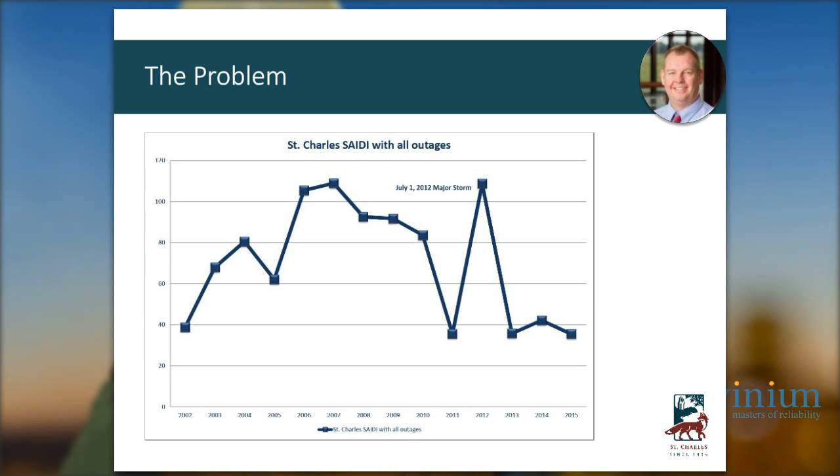So here's the problem. Hopefully everybody here is familiar with SAIDI, which is the System Average Interruption Duration Index. This is how many minutes per year the average customer in your city is without power, and we had been clipping along in the 40 minutes type area, and then through the mid-2000s we got into the 100 minutes. So that's a 100% plus increase in the number of customer outage minutes, and that was definitely something that our city council, elected officials and our population identified as a concern, and at that point, the electric utility was told to come up with something and fix it.

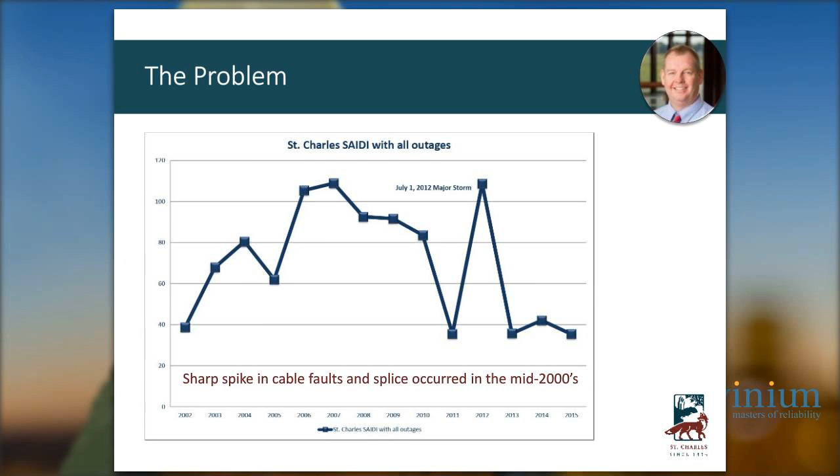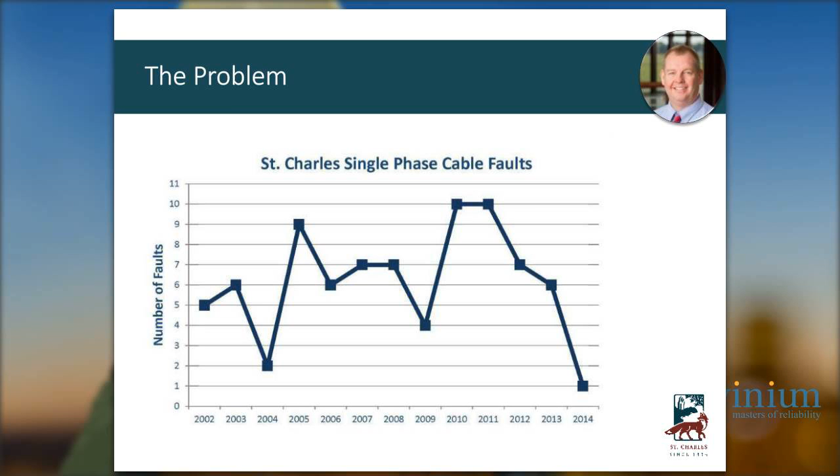So the reason for the bubble here that we see in the mid-2000s was a majority caused by some pretty major single-phase cable faults in people's backyards that led to long-duration sustained outages. Our cable faults actually got worse in 2010-11 as we were just getting into the program, but we did have a sharp spike in these cable faults through the mid-2000s. So we would go from 5 or 2, which was pretty manageable and not very impactful to your SAIDI number, to 2 years in a row at 10. And when you're averaging 1 a month sustained outage in a residential area, that obviously is going to draw some attention from your customers. So the work I'm talking about here today is our senior distribution engineer.

His name is Steve Shroba. He has a long tenure with Commonwealth Edison and then with the city of Naperville in Illinois prior to coming to St. Charles. He's a very modest man. So I am here on his behalf sharing some of the brilliance that he's put into our complete plan to

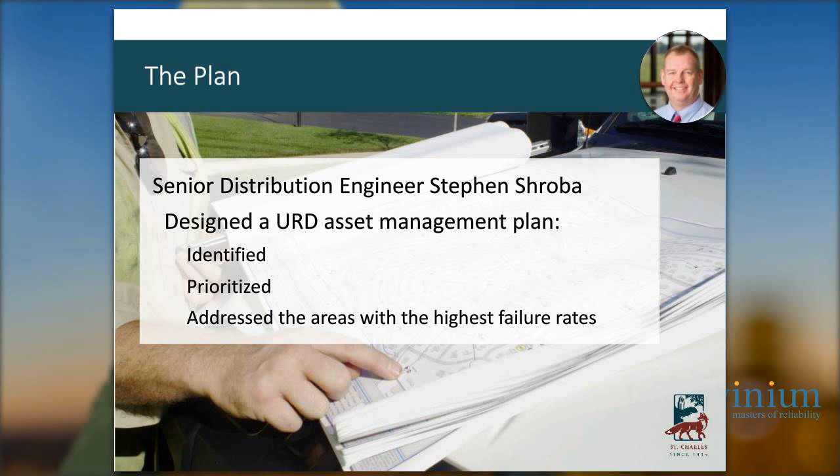address our URD cable. So his program that he laid out, first we identified all of the cable that we had in the ground. We had to prioritize which subdivisions and where we were going to go first. And then obviously he started with addressing some of the areas where we've already had cable faults, in some cases, a number of cable faults.

So what the plan looks like is a pretty interestingly colored spreadsheet in Excel. It's nothing fancy, but I'm going to go through the different elements of how we prioritize based on a multifaceted approach. It's not just age, it's not just previous problems. There's a number of things that Steve boils into why a certain subdivision is the next one to get reinforced.

So we start with subdivision and subdivision age. That can be very difficult, I understand that, to try and figure out where all the subdivisions are. We use the GIS mapping-based system to try and pull the pieces of the city apart in chunks using subdivisions. And in terms of age, we would go to the plat of survey or plat of subdivision from when the plat was recorded to get an age.

Another trick we used was transformers: many times either their serial number, or some of them actually have a year or a date of manufacture, month, year of manufacture, to try and at least get a feel for what span of years that subdivision was built in. Okay, so here it is a little closer.

The next thing we did is we looked at how many faults has the subdivision had. Obviously, if it's already had 1 or 2 faults, that's going to take a higher priority to something that hasn't had a problem yet. Traditionally, we would wait till a subdivision picked up its second fault, and then we would send the directional boring crew in and replace every cable in the subdivision after a second fault.

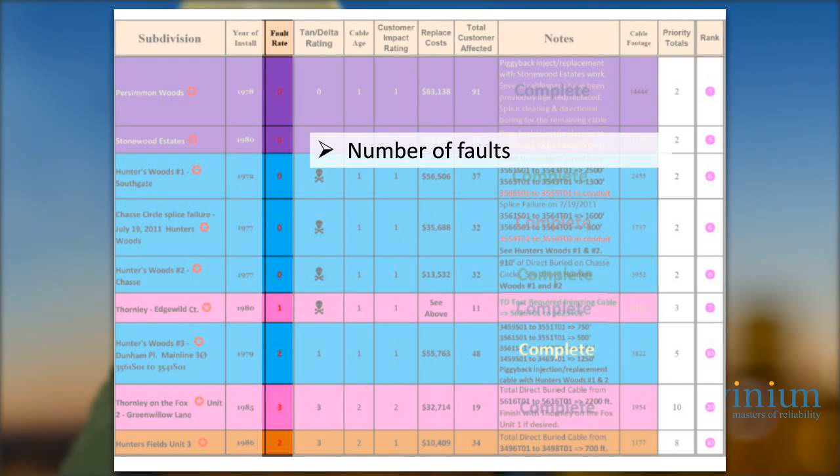So when you're having 10 faults, not only are there 10 neighborhoods that have some sustained outage, but there's also, in some cases, hundreds, if not many hundreds of customers, and you get the calls that they have to reset their clock because they had the momentary on the recloser.

So the next thing, which I think is very special with what Steve has embraced and has put together here, is to determine the insulation quality of these old cables by using VLF tan delta. And for the folks who might not be familiar with it, it's very low frequency.

It's 0.1 hertz testing. And then the tan delta element basically is a power factor test for the cable insulation value. And there are IEEE standards for new cables, and that's what we reference when we test before and after.

So one of the clever things that people pick up on when they see Steve's spreadsheet here is his skull and crossbones. Everybody loves that. Those indicate places where Steve had the test rig, and before we got to the rated voltage of the cable, the sine wave at the top of the amplitude in terms of voltage starts to collapse. And that's an indication that the cable is on its way to failure. And at that point, anytime we see that, we immediately shut down the machine.

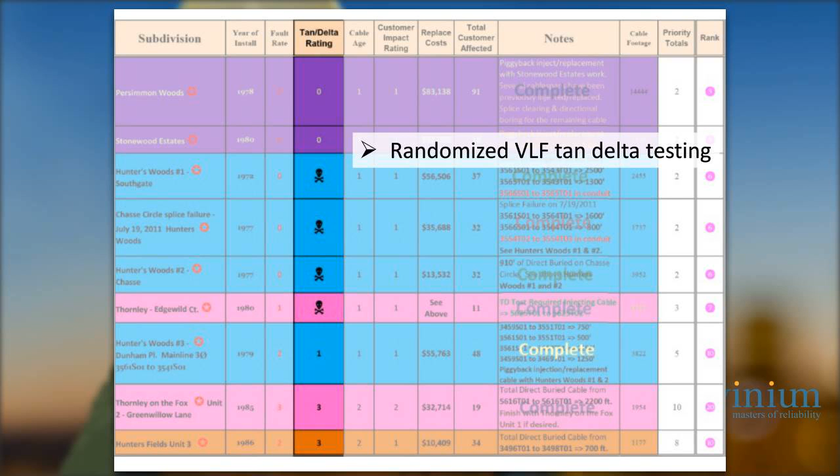I'll note that those spans that did fail VLF, meaning that they're a ticking time bomb and an imminent failure, we didn't change any of our plan in terms of our injection, and all those spans ended up being injected and went on their merry way.

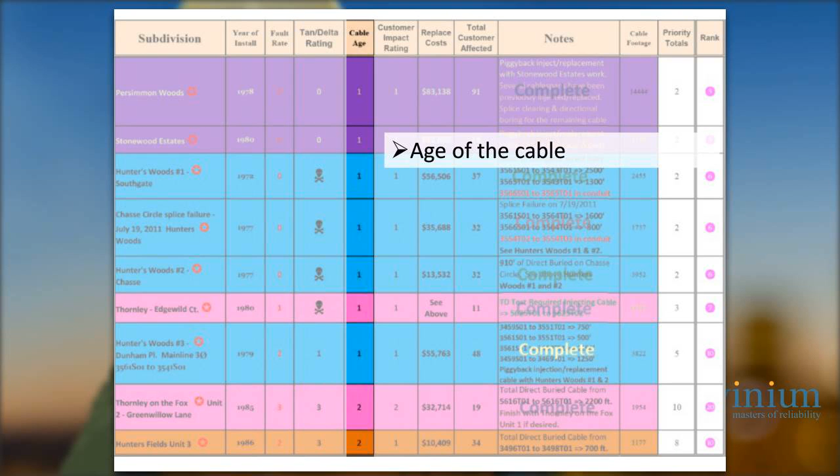So, all right. The next thing is age. It's obviously an element. We find it not to be a primary element. We put it in there. If all things are equal, then we're going to do things by age, but it's not a very highly weighted piece of our puzzle here. But what is a heavy piece is what would be the fault's impact on customers.

Is it a radial location that's going to be a long sustained outage and we're going to have to dig up and splice? Or are we talking about a loop, and we've got some monster loops with 20 single-phase transformers on it? That's obviously going to be much more impactful in terms of customers and your SAIDI compared to something that's a 3-transformer loop. So Steve goes through and identifies within the subdivision whether it's going to be something more impactful if we did have a failure.

Okay. So at that point, we thought we had a pretty good plan where we had figured out what subdivisions we had, what the population of cable was, and what the priority was. And we had to get budget for this, and we recommended a hybrid cable replacement, cable injection. So it's the first time that we were injecting cable. This was in 2009 we started injecting cable.

It was a new concept to us, and we went to City Council, explained how we're going to prioritize the subdivisions, and that to maximize our available budget, should they approve the project, we would be prioritizing on cable injection, which at the time we felt was about 50% of the cost of traditional replacement. It turned out to be closer to a third of the cost. But at the time, we sold it as: if we could inject everything, we could do double the cable for the same budget money.

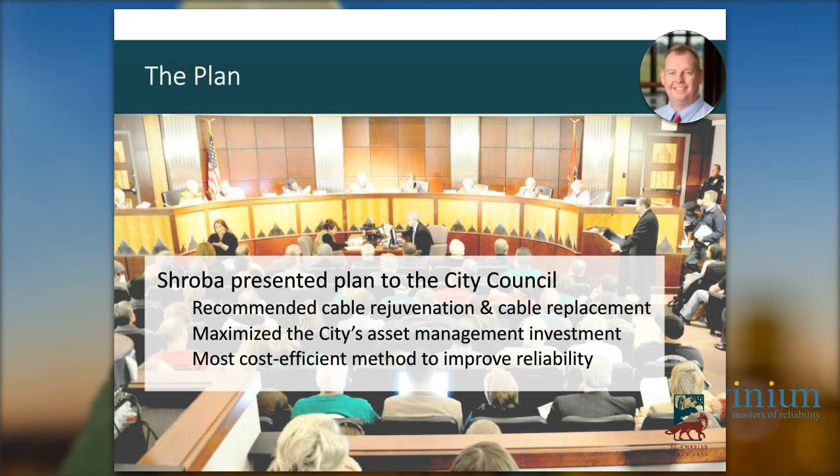So through that, we could maximize how much of the cable assets we were going to get through in a given year, and it was obvious it was going to be a multi-year project. Even if we were given unlimited funds, there isn't enough manpower to replace all of the cable in the city of St. Charles that quickly. And obviously, we felt that was the most cost-efficient way to improve reliability, if we could embrace cable injection and rejuvenate as much cable as possible in a short period of time with the limited funds. That would be the best way to turn our reliability problems around.

So in 2009, we started injecting our first cables. The process starts with Novinium assessing each cable within the prioritized subdivisions. So we started at number 1, and Novinium and the city crew went in and started looking at the different cable spans. I wanted to talk a little bit about the injection process.

Novinium offers 2 different processes. One is called sustained, and in a sustained process, which we prefer and prioritize, you inject the fluid under a higher pressure, and in general, for our span lengths, it's an hour, hour and a half, 2 hours. The fluid goes from one end of the cable to the other end of the cable. You seal the ports, put the elbows back on, put the cable back in service, and go to the next one. So sometimes we're getting 3 and 4 spans per day done using the sustained method.

If there are accessible splices that would otherwise not have allowed the flow of the fluid, we do dig those splices up and inject using a special splice that lets you inject from the splice back to the termination point, whether it's on a pole or in a transformer. So if there's a splice, sometimes we'll skip it if we didn't know it was there. Other times we'll dig it ahead of time and just go right to there and inject both ways.

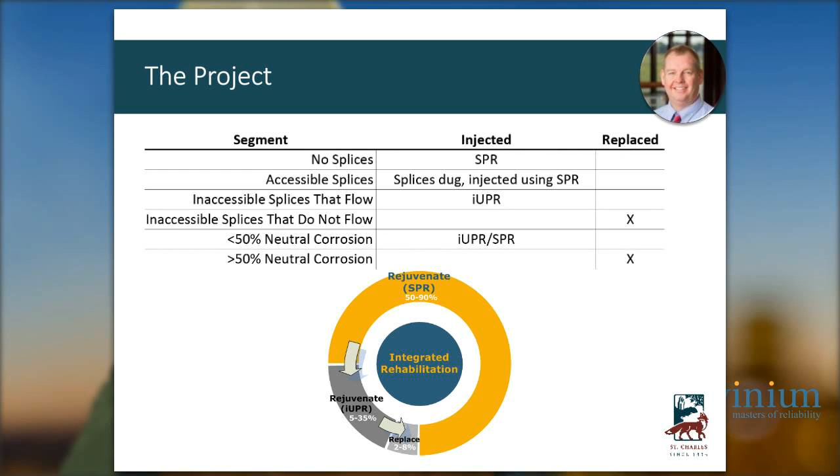It goes without saying, if you can't get at the splices or you can't flow the fluid, then you end up just having to send in the directional boring crews. One of the things that a lot of people don't take into account, but we have, is that as part of the Novinium testing on each cable before we inject it, if the neutral is more than 50% corroded, we have determined that we do not want to save that cable. We're going to go ahead and replace it, put new jacketed cable and pipe, and not inject a cable where the concentric neutral is more than 50% degraded.

Through that, the little circle here, depending on subdivision, most of the spans were able to rejuvenate using the sustained process. Based on how people installed cable in the 60s and 70s, where they would put a trencher in the ground and they'd run the cable in the trench, and then at the end of the cable they'd direct bury a splice and just keep going. We had ended up with a lot of splices, and with a lot of the neighborhoods, they were very difficult to dig up. So we did end up with a significant number of unsustained injection spans. And then there's about 10% of the spans that you end up just not being able to inject due to either inaccessible splices that don't flow or corroded neutral.

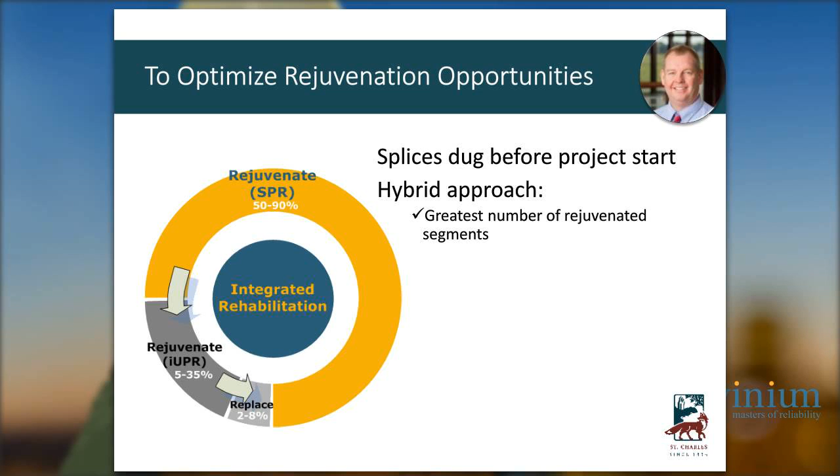Steve and I have been pretty open about the fact that the effort is to get as many feet and spans of cable rejuvenated and reinforced as fast as possible. And even though we prefer sustained or we prefer injection, we're going to do whatever we got to do in that subdivision. So if we can't get sustained on that span, we'll do unsustained. If we can't get unsustained, then within 30 days, we're out there replacing the cable with traditional means.

In the event that you have a difficult to access splice, but it will flow fluid, by being flexible and accepting the unsustained process, which again takes that second trip, you get the cable rejuvenated at a lesser cost than traditional directional boring, and you don't have to dig that splice. I can't overstate enough how the customer experience from cable injection is different from traditional directional boring.

As I talked about all the problems in people's backyards, that amplifies when you actually have to send a mini backhoe in there and dig a hole in front of their transformer, then get a directional boring rig into somebody's backyard. You have to dig all kinds of potholes wherever you're crossing some other utility, so it's not just a hole on each end. There's a number of holes in between the two ends of the directional boring span. And then after the directional boring is done and you've disrupted the yard, even after you've backfilled, then the city crew is coming in to replace the cable, and that's another day or two that their backyard is disrupted.

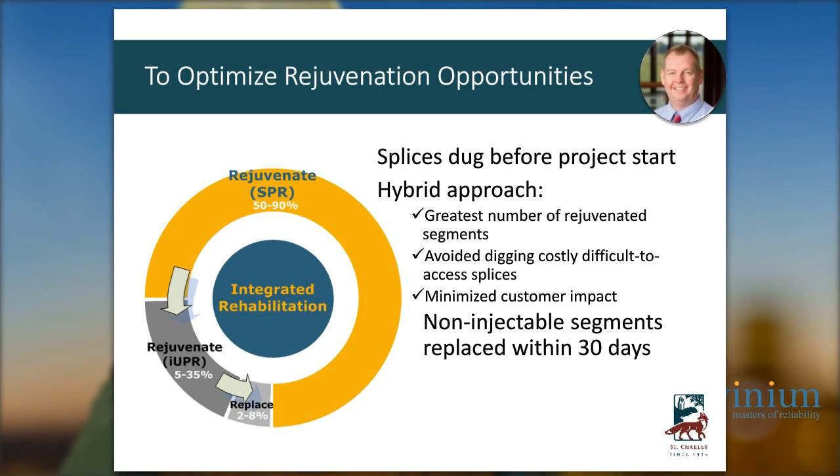And then I will highlight that all of it's for naught if you end up with a cable fault on something that you had to bypass because you couldn't inject it. So we do prioritize that in the 10% cases where we do have to actually come in with a directional boring rig, we try and get that done within 30 days so that we don't pick up a fault in a subdivision that we're trying to reinforce.

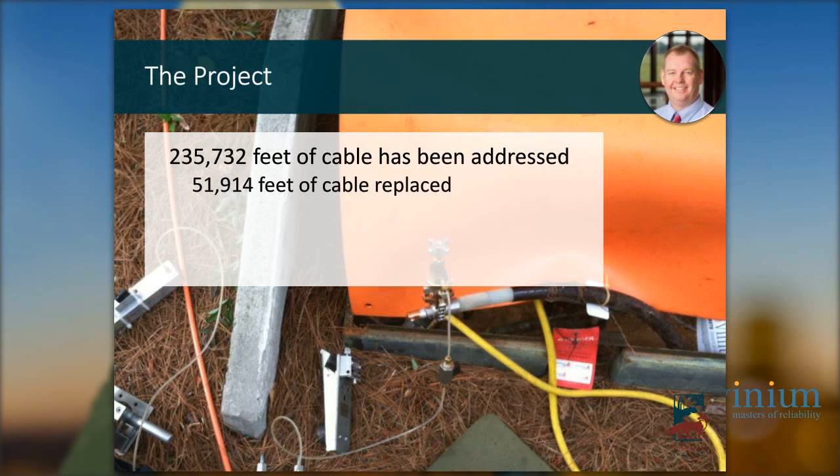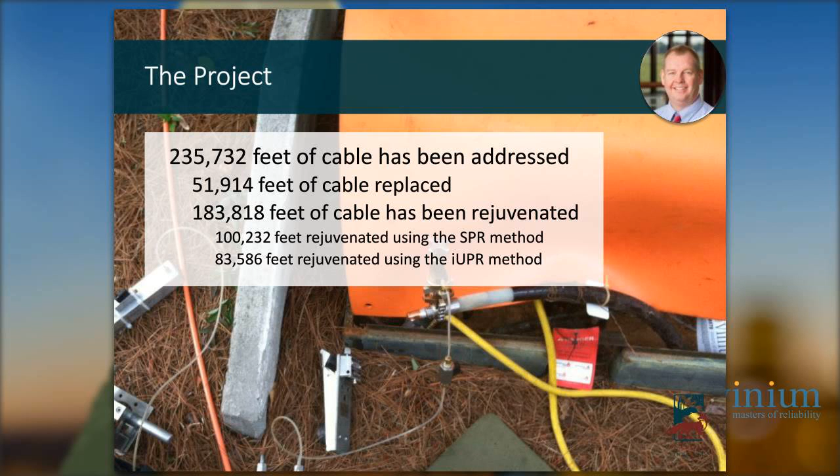So how that works in terms of footage is, in our 5 years, we've done roughly 235,000 feet of subdivision cable. So we're getting near the halfway point. About 52,000 feet have had to be replaced via traditional means. And then here's how the other almost 200,000 works out in terms of sustained versus unsustained. And again, maybe our installation methods are different than others, but we have had a lot of splices in this cable from the 60s and 70s.

One of Steve's strengths in terms of diagnostics and selling this to both me and to the City Council is the use of tan delta and power factor testing this cable before, and then we made him go back afterwards. So Steve went back at 6-month intervals after injection of the spans that were originally targeted as test spans, and he VLF tan delta'd them for 15 minutes after 6 months, 12 months, and 18 months.

What was surprising to us, but not surprising to Novinium, was that at 6 months, actually the tan delta results got a little bit worse. So the cable was appearing to continue to degrade with respect to insulation value. At 12 months, it was back to where it was before injection or a little better, and by 18 months, it was testing like IEEE brand new cable that you'd put in the ground and buy today.

What we had to understand is that it's not a miracle fluid. It is injected down the strands, down the center of the cable, and it's going to permeate through the insulation and fill the trees and voids, but it doesn't happen immediately. It takes some time for that fluid to permeate through the insulation. So that's why after 6 months, on some spans, it just hasn't gotten to fill all the trees that it needs to fill to restore the insulation.

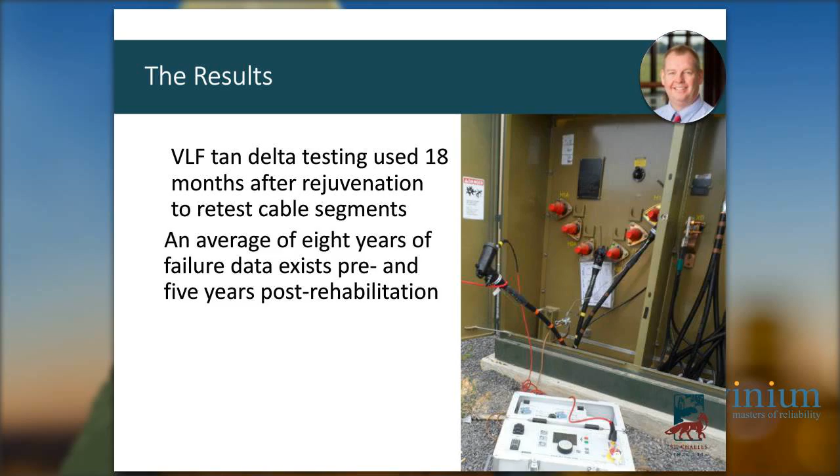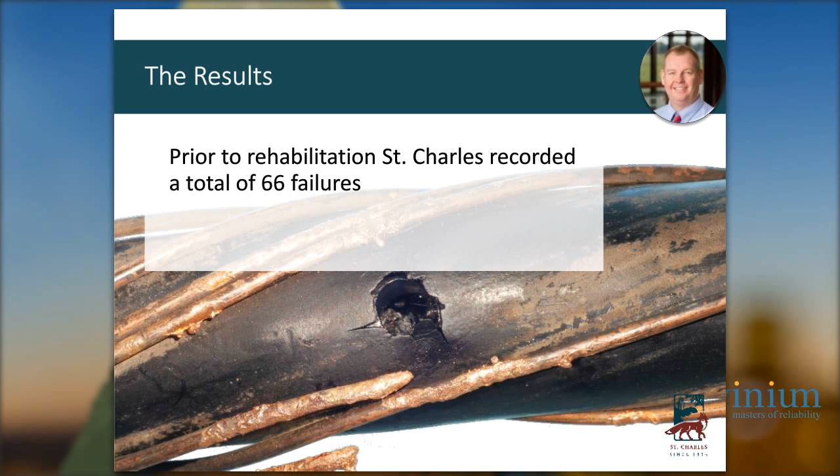So now I've got a pretty good history of 8 years before we started cable injection, and then 5 years after we embarked on this really aggressive cable replacement plan. So that population of failures is 66 at this point. Again, the majority of those before we started injecting or in the early stages, but we've had only 3 since we started doing the cable injection and the aggressive replacement. The 3 that have failed were all very early after cable injection. I think one within a week, and the others certainly within 3 to 6 months.

And those are indicators for us that we are exactly where we need to be. We injected it. We were maybe 3 or 6 months late. Had we been just 3 or 6 months earlier, we would have probably avoided that fault. But it gives us the confidence to know that we are not injecting subdivisions well before they need to be injected. At this point, we feel we're right at the cusp where we are injecting cables that are going to fail within the next year. And that's, I think, the sweet spot, and we're really, really happy with where we're at.

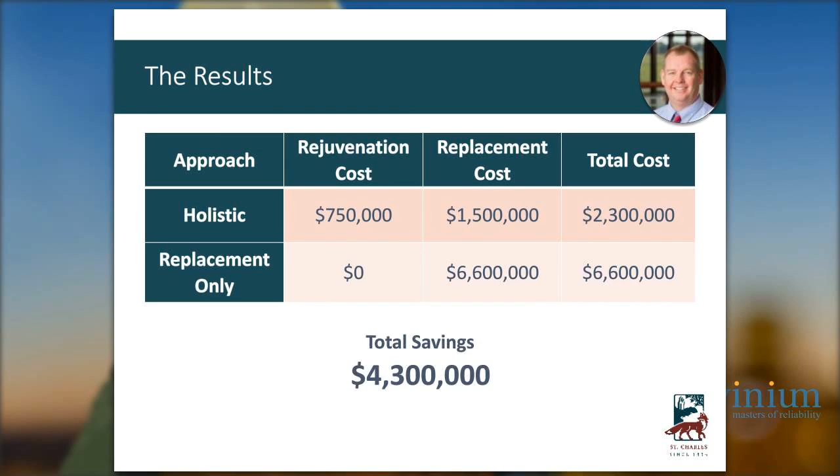Okay, so as it was kind of obvious from the number of footage, we're still in the midst of the program. Where we feel really good about ourselves is that we are injecting subdivisions that have never had a cable fault. And if we're just aggressive enough to where we're staying ahead of the faults, we'll inject it, and the fluid will have time to fill the trees before we end up having any cable faults in that subdivision. So I think that's right where we want to be.

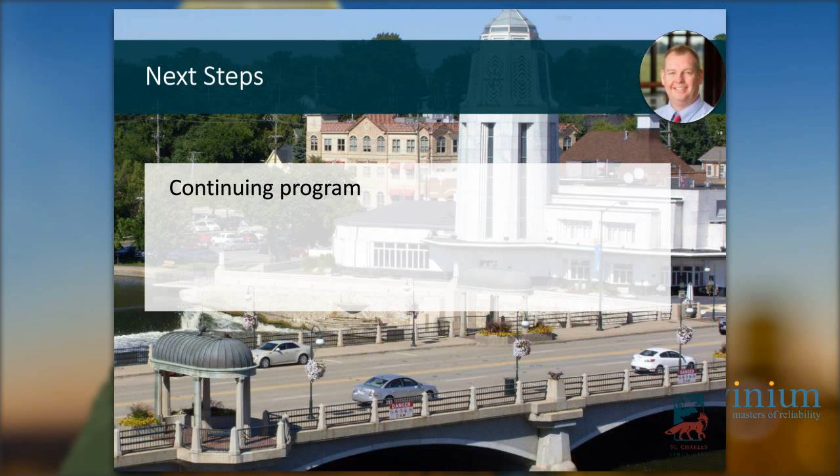We're not in subdivisions that are still going to have 10 years of life on that cable, and we're really prematurely replacing it. I think through, unfortunately, the failures we've had, we are really comfortable that we're right ahead of where the cable needs to be replaced. This has become part of our annual budget, so the alderman and the mayor and the city administrator for us are to the point where they ask each year what subdivision's next. They hear it every year. It just has become part of our routine.

I've promoted the fact that we've reduced single-phase cable faults. For the 3 we've had, I've explained why those failed only 6 months or a week after we injected them, and they've accepted that. And in the same way, they've understood that we're not doing cable that still has 10 years life on it. We're right where we need to be, and hopefully we're 12 months ahead or 18 months ahead of cable faults, which means that you'll never have another cable fault in a single-phase residential environment.

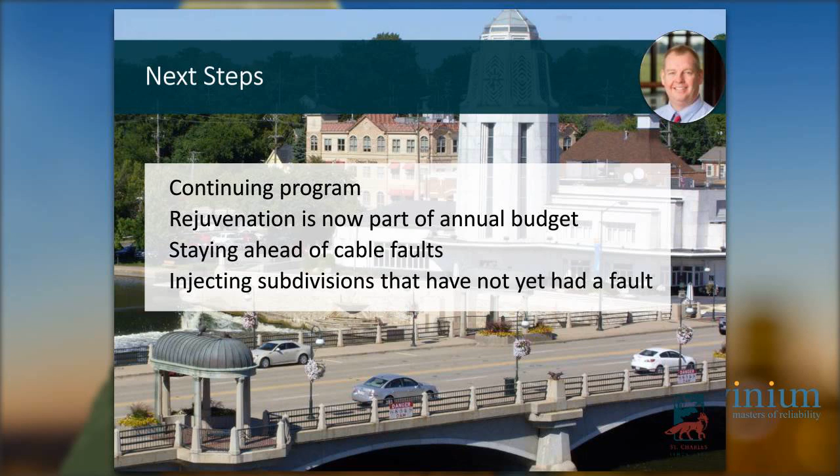Okay, and it may sound interesting for some people who are still trying to figure out how to get to all the subdivisions that have fault on fault, and you're worried about being able to switch loops. We are injecting subdivisions that have never had a cable fault. So that's part of the big message, and I think that's part of what St. Charles is very proud of, and what Steve should be very proud of, is that it is possible to get ahead.

So after having so many subdivisions, 20 cable faults over 2 years, to go from that and being totally reactionary to those 20 faults, and then 6 months later, we're digging all kinds of holes in people's backyards. Now we're not disrupting their backyards as much or as frequently. We're in and out, and they never had to experience the bad reliability of the cable faults.

Okay, so to summarize here, one of the big things is if you can embrace testing. We are a VLF tan delta shop. Partial discharge would probably be another very reasonable testing method if you had that equipment or you were comfortable with that. But being able to assess the insulation of the cable more than just age. I think that was something that we didn't expect originally, but we bypassed some subdivisions from the late 60s in preference for subdivisions from the mid 70s. But that's what the cable testing showed us we needed to do, and we stuck with the program, and that's what we did.

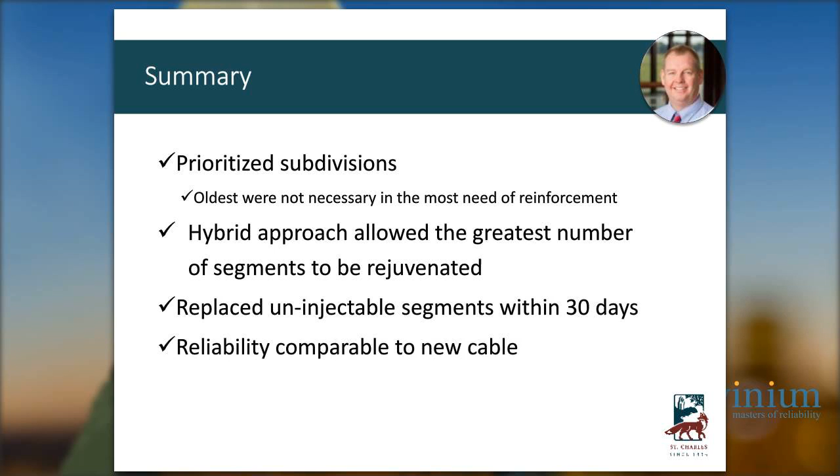And through the VLF Tan Delta, we have verified that 18 months after injection, this cable is testing, on a TD, at 1.0. It's testing just like brand new cross-linked poly cable, even though it's 1960s Essex cable.

And making it a continuing program, something that becomes year over year, where you're just going to work from one subdivision to the next. That also offers us the opportunity to accelerate or slow down. So if we have a big subdivision and we want to cut it in half, and we want to do part of it this year and part of it that year, when it's a continuing program, it just self-sustains and keeps going year after year after year until we're done with all of our residential underground direct bury stuff.